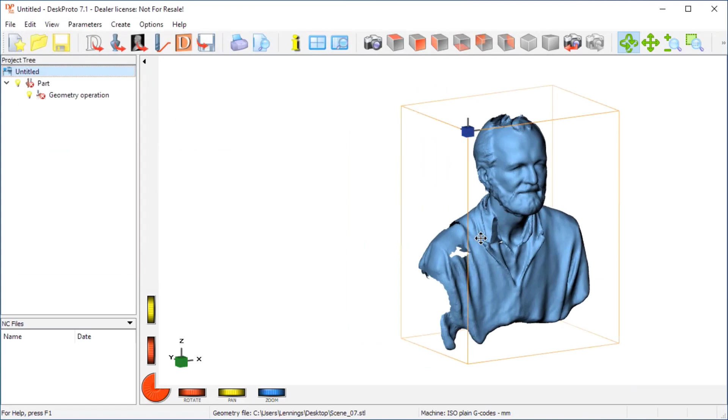Let me first start DeskProto. Yes, here we are. It's the multi-axis edition. You need that for this project. And what I want to do, I start a geometry project as we want to process an STL file. The STL file is on our desktop. It's Scene number 7, and here it loads the geometry. You can see it from all sides. It's a nicely detailed scan of myself.

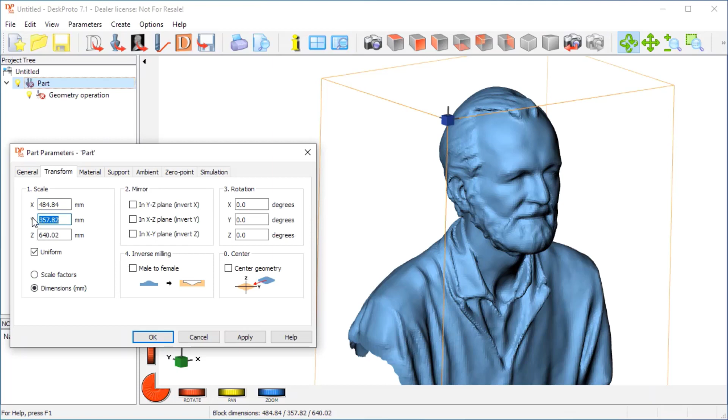Okay, all the settings that we are going to enter. First, all part parameters, and the first thing I want to change is the size. As said, I have a very small machine, and otherwise DeskProto keeps complaining that it doesn't fit in my machine. The Y size of my block is 50 millimeters, so that's a good scaling, and it needs to be rotated around Y to get it aligned with the rotation axis. So here 90 degrees, apply, here we are, and then I need to check the option use rotation axis.

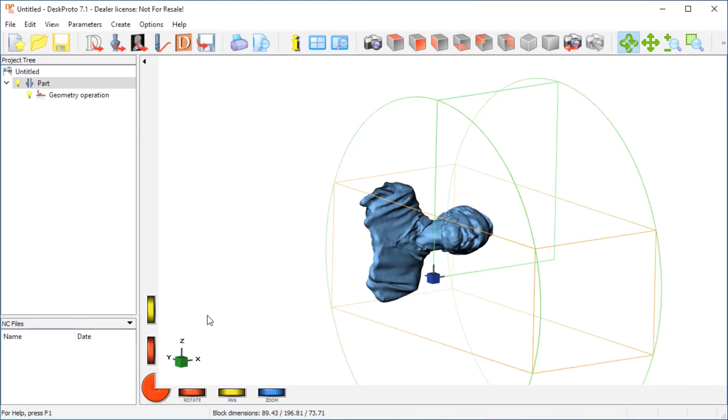A number of messages about details that will be changed. I'll leave that for what it is. I say apply, and I can immediately see that this is not what we need. DeskProto rotates the geometry around the x-axis as present in the STL data, and it seems like the CAD 0 point is the location of the iPhone while scanning. So this is not what we need.

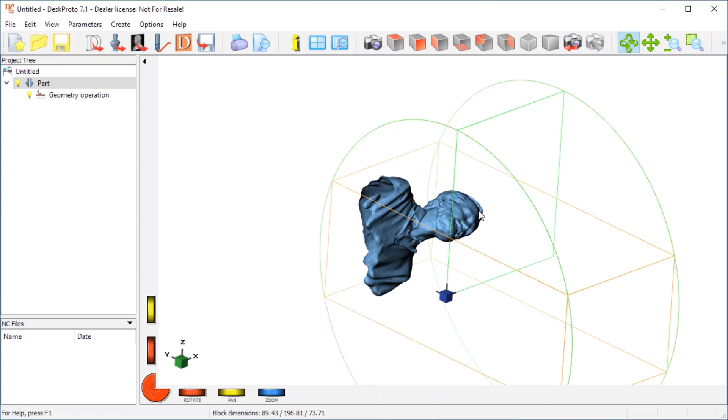We need a rotation axis within the STL geometry, and DeskProto has a nice option to achieve that. You can center the geometry. Here we are, this is better, and here we have our geometry nicely aligned with the x-axis. Perhaps the alignment that center geometry offers is not sufficient for you. In that case, there are more options to fine-tune this alignment, and I'll show the DeskProto website.

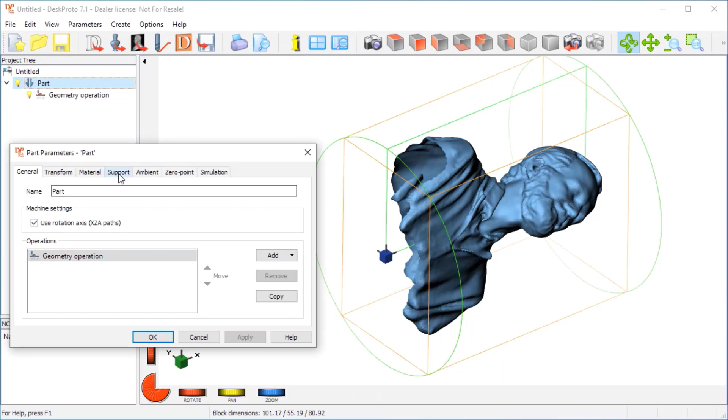Okay, back to DeskProto. Here we are, and we continue in the part parameters, and the next thing I want to set is the block size. Let me make a front view. Yes, because here on the right side I want to make the block a bit larger in order to allow the cutter to reach completely around the top of the head. Here's the material. I set it to custom. On this side a bit larger.

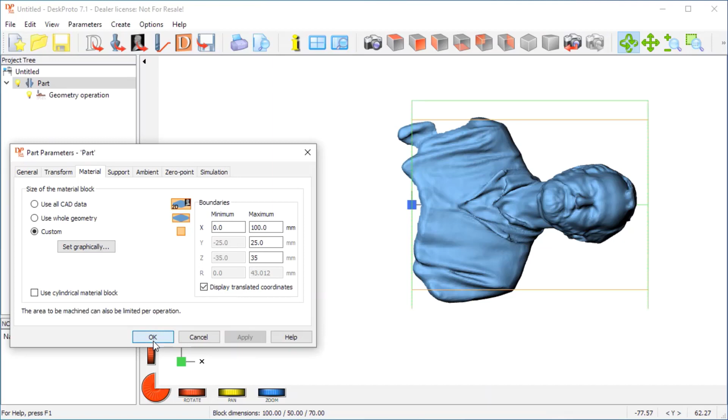My block is 100 millimeters, so I start at 0, now I have 100 millimeters, and the block was 50 millimeters around Y, and it is 70 millimeters around Z. So this is 50, this is 70, here we are, and you see that part of my shoulders and part of my back as well will be outside of the block, but that's not a problem. The head is there, and most of the important geometry will be there.

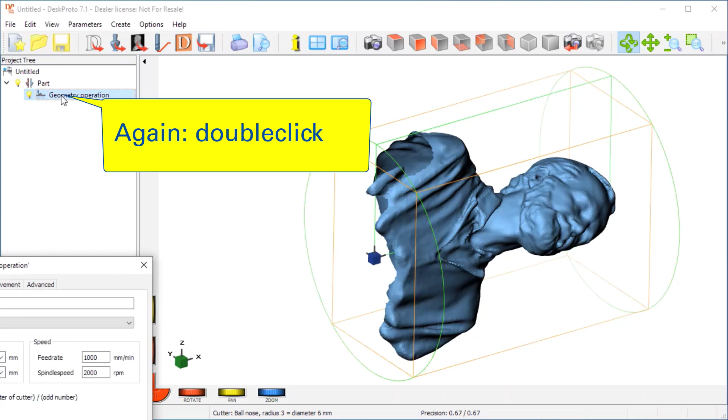Okay, that is the part parameters, and I continue with the operation parameters. First operation is for roughing, so I also call it roughing to make that clear. A 6mm ball nose cutter, that's okay. I want to use a skin of 0.5 millimeter to be removed while finishing. And as the wood is quite hard, I want to be careful in going down. My layer depth, the pass height, I will set it to only 6 millimeters.

What more can be said? A distance between toolpaths of about 1.5 millimeter. This one a bit smaller to have sufficient detail. Feed rate may be a bit higher. 1200 millimeter per minute is okay. The strategy, I want toolpaths around the rotation axis, so around A, but then I want around A reversed, because I want the cutter to start at this side and then slowly move back to this side, as here most of the block is connected to the rotation axis, so around A reversed.

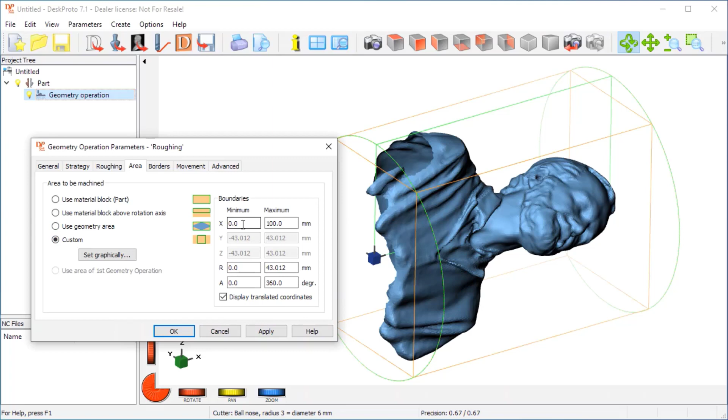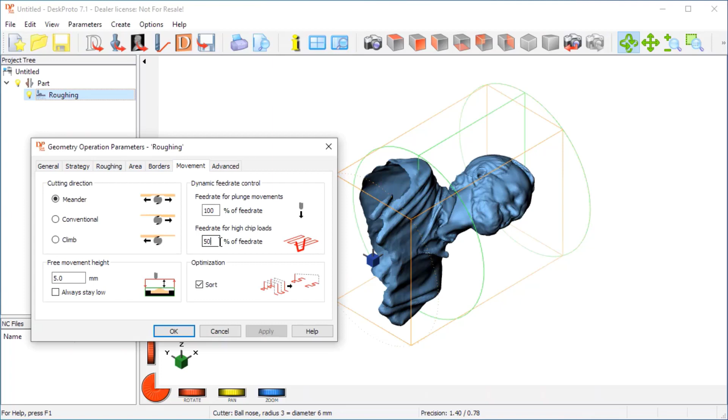The area needs to be a bit smaller, because here the scan is not complete, so I want to start machining at 30 millimeters, and you can see here that is okay. From 30 to 100 millimeters the scan is complete, so I can use that area to machine my sculpture. Further in roughing, borders is okay. Movement, well, the high chip loads I make a bit smaller, as this is a hard wood. Well, that's it, no more things to change, so okay.

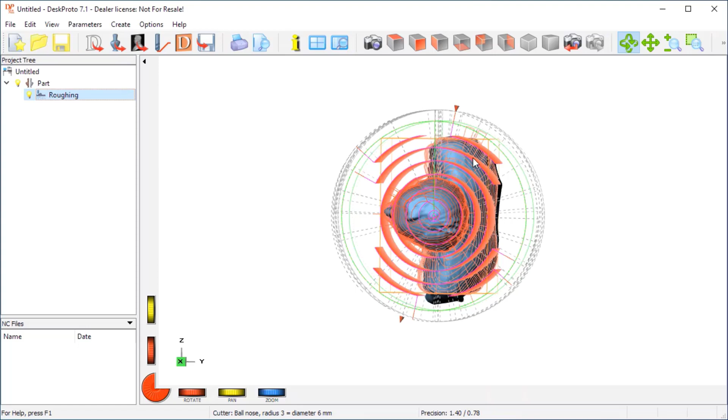Calculate toolpath, that's rather quick, and here you see it goes down in a number of layers, 6 millimeters each. The block is rectangular, so only the corners are machined, and from the third layer it will go round and it machines down here completely to do the top of the head. So that's the roughing. And next, obviously, there needs to be a finishing operation, so I copy this one, copy the operation, I call it finishing.

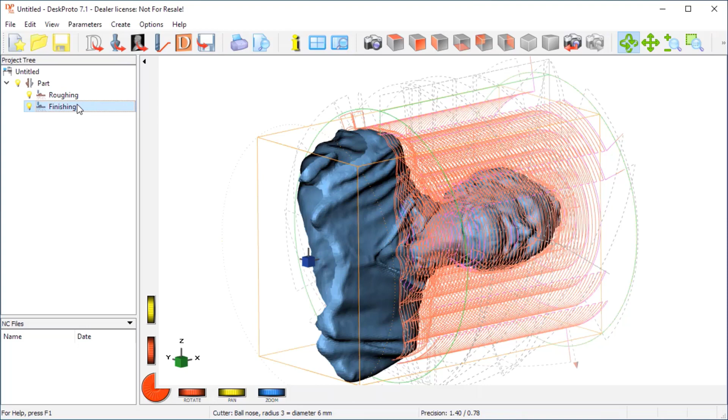That's not good. So okay, I want to finish with a smaller cutter, 2 millimeters diameter. Obviously no roughing here, so no roughing skin and no layers. It can be much more accurate here. Distance and step size both 0.12 millimeters. Feed rate can be a bit higher here, and especially the spindle speed needs to be higher for this thin cutter. However, on my machine I need to set the spindle speed on the machine. I cannot set that in software.

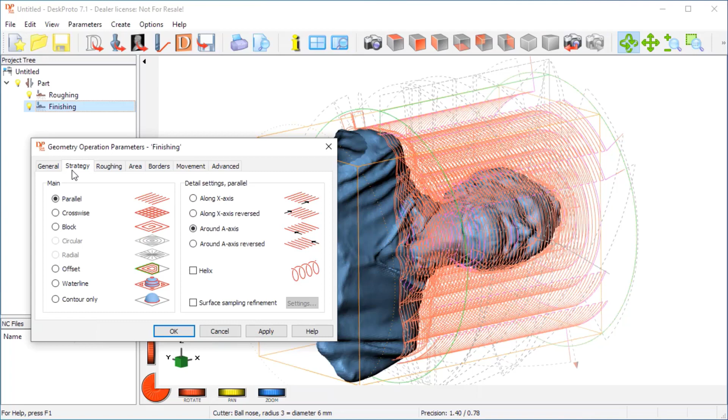The strategy also around A, but now it can start at the left side, and I want to use a helix toolpath. However, it's not activated here. That's because you will see here on the movement tab the cutting direction is meander, and I need to use either climb or conventional. I choose conventional, and now I can select the helix operation.

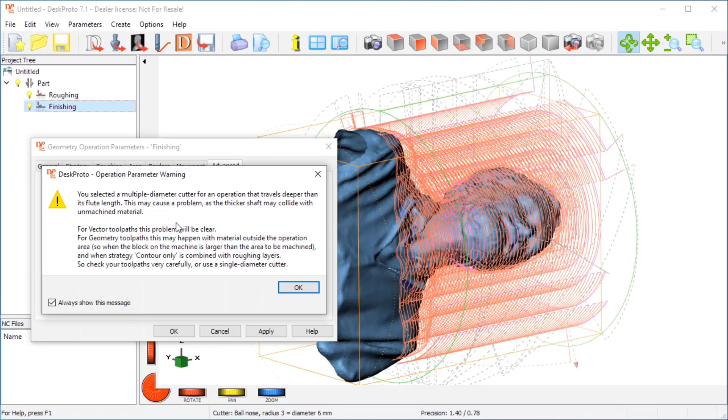Roughing, we went there. The area, well, same as for roughing, that's okay. Borders is okay. Movement, well, everything is okay, so I get a warning about a multiple diameter cutter. However, as we have done a roughing operation first, that is not a problem. So I can calculate toolpath for the finishing operation, which takes a bit more time, as obviously a very long toolpath to be calculated with a pass distance of 0.12 millimeters. But it's almost ready quite quickly.

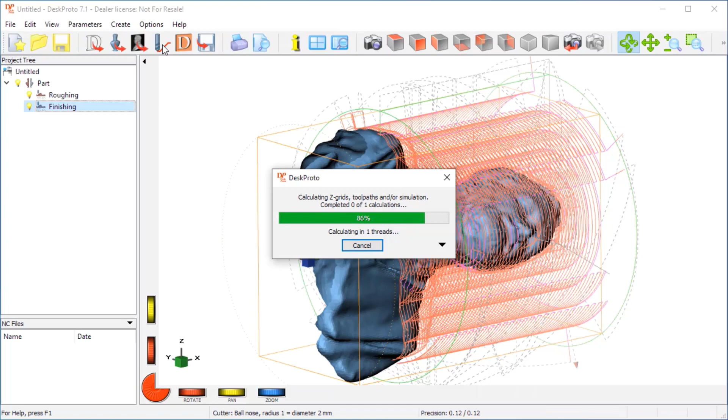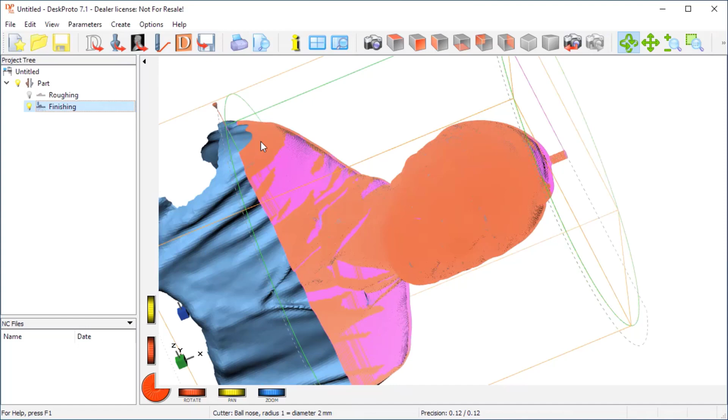Here we are. So I'll switch off the roughing by clicking on the lamp icon. This is the finishing, so it's one very long toolpath in a helix movement from minimum X to maximum X. So okay, that's the toolpath. What can I do more?

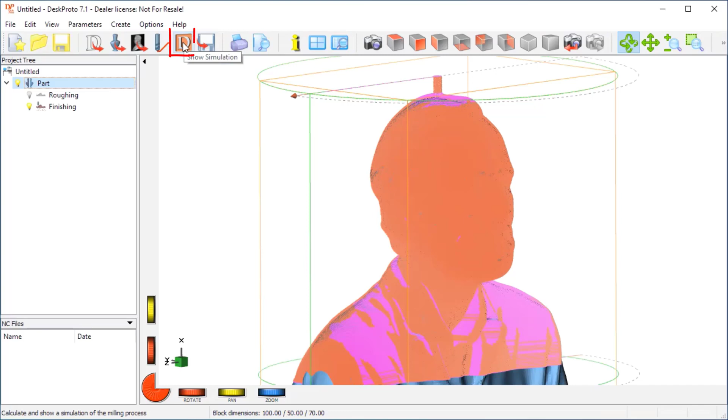I can show you a simulation of what the result will look like. And in order to get a nice simulation for this part, I need to change the simulation resolution. I will make it a bit higher. Okay, and now I can select show simulation. It calculates the block. Here's the block.

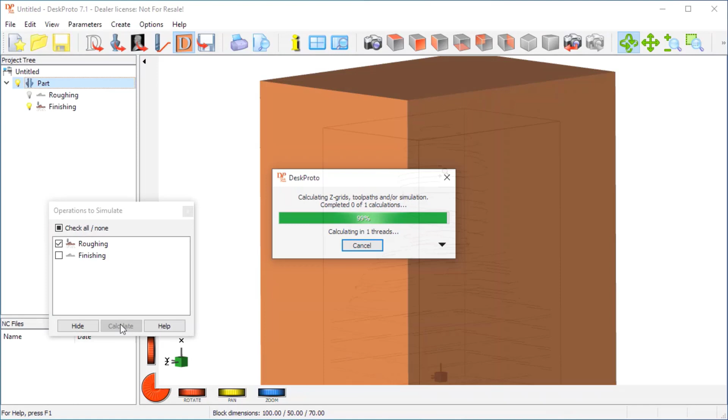First I check the roughing, calculate, and that will take a bit of time, obviously, so I'll let the video run a bit quicker. And here's the simulation for the roughing.

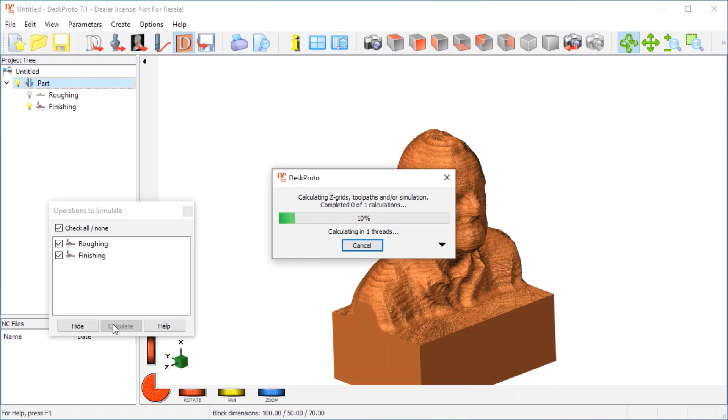Well, as you can see, it looks indeed quite rough. However, all material has been removed except for the skin, which can be removed by this very thin finishing cutter, 2mm diameter. And again, this will take some time, so I'll speed up the video.

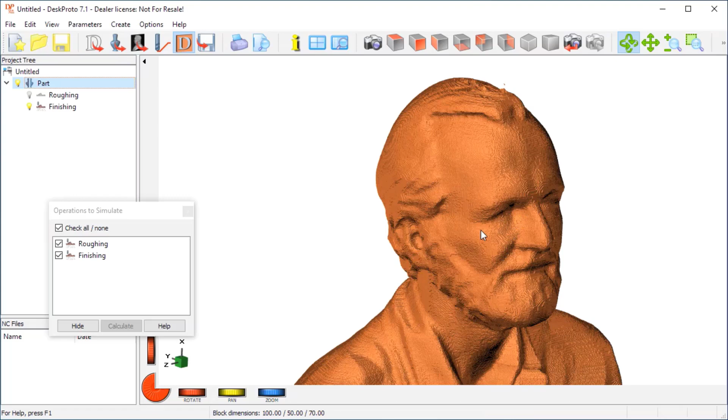And here we are, the result, a nicely detailed sculpture of Mr. Lennings, and well, I'm looking forward to what it will look like when machined in wood. So I'll hide the simulation, back to the toolpath, and the final step in DeskProto is writing the NC file.

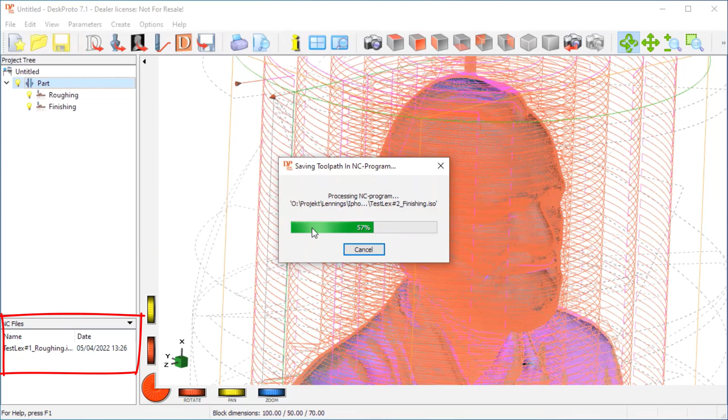I call it TestLex, and as you'll see, DeskProto will write 2 NC files, one for the roughing, well, that was very quick, and one for the finishing. I can show you by again selecting this one for roughing, a small file, and one for finishing, and I will now take those NC files and proceed to the milling machine.

For this sculpture, I wanted to use a piece of light colored hardwood allowing sufficient detail in this very small sculpture. So I went to the Amsterdamse Fijnhouthandel to find a piece of wood, as they have a very large assortment of various wood types and various sizes. I found this beam of American maple, hard maple, called Esdoorn in Dutch, and I sawed a piece off and attached it to the rotation axis of my milling machine, as you will see in the next shot.